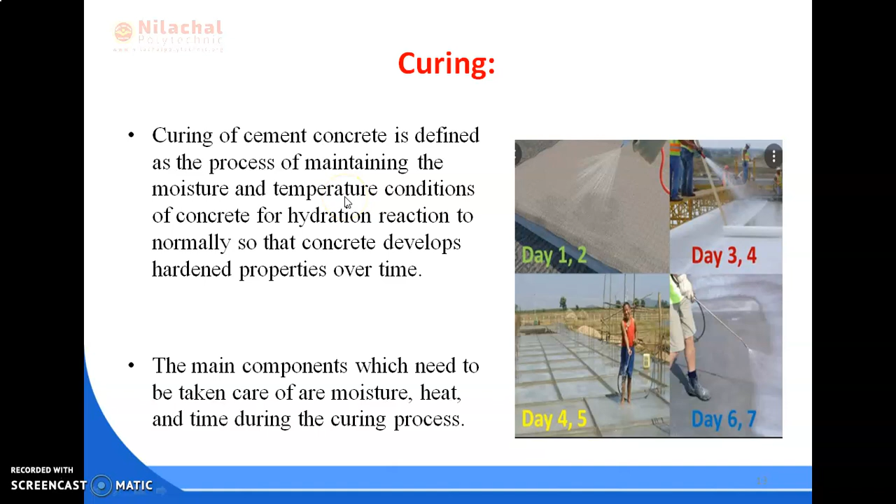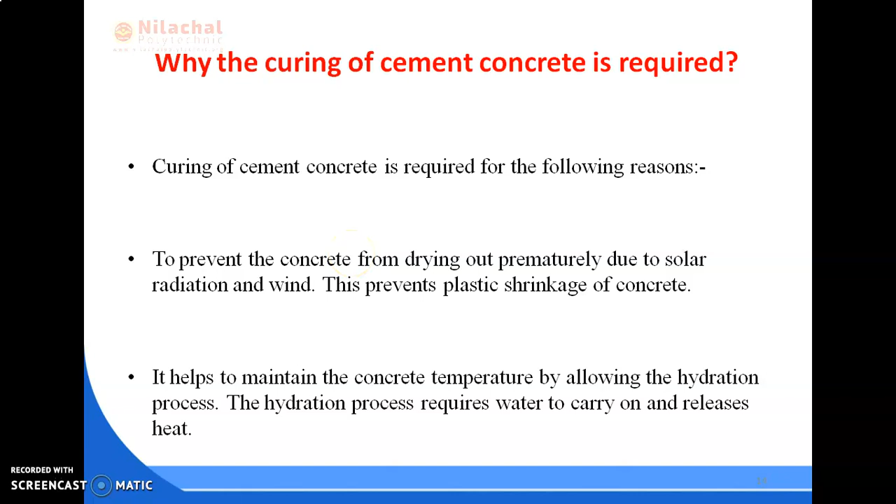In today's lecture, we again continue the same chapter which we started in the previous lecture. In the previous class we already discussed the different methods or steps of manufacture of concrete. We have also discussed curing and why curing is required for the concrete. So, now we are going to discuss different methods for curing.

Before that, I want to discuss some effects of improper curing: the compressive and flexural strengths are lowered, durability decreases due to higher permeability, the rate of carbonation increases, and the surfaces are coated with sand and dust, which leads to lower abrasion resistance. So, due to improper curing, we have to face these problems in concrete.

So, methods like water curing, wet covering, formwork curing, membrane curing, sheet curing, curing by absorbing heat, hot mixing method, electrical curing, infrared curing, cover with sand or sawdust or soil, etc. Natural curing, which is exposed concrete. So, these are the basic or important methods which we use to provide good curing to concrete.

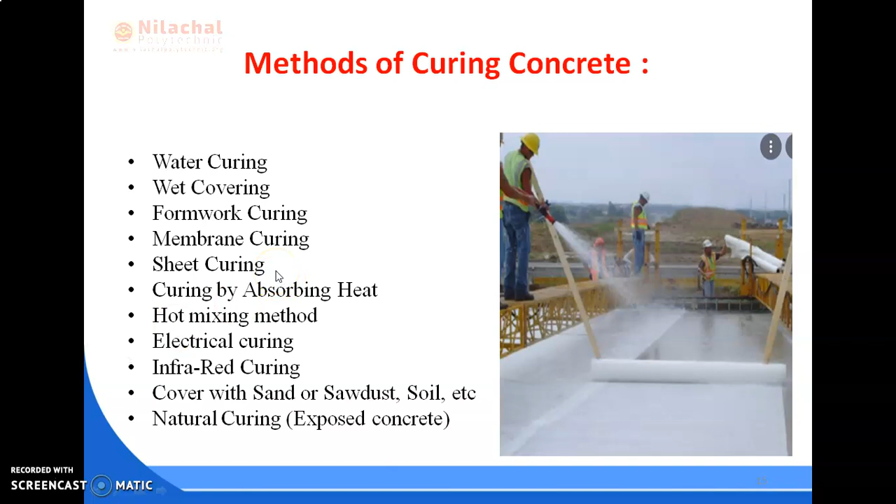And shuttering, as I have already told, is a synonym term of formwork. In many countries, people use the word shuttering instead of formwork. And formwork is the most effective curing agent in construction, especially in thick concrete where the hydration temperature is high. This method is used.

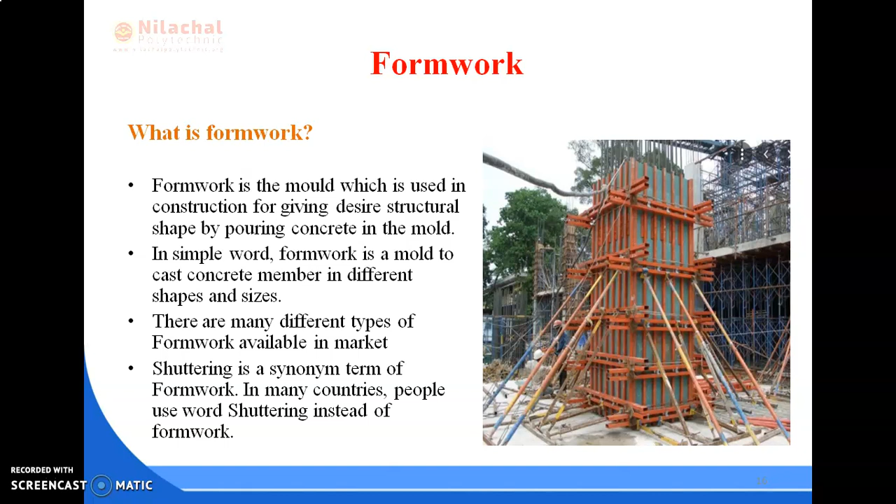So, this is the formwork. A good formwork should be strong, stiff, smooth and leak proof. Otherwise, there are chances of segregation of the fresh concrete. The cost of formwork is 20% of the total cost of the project. So, the forms are properly designed and detailed to effect economy without sacrificing strength and durability of concrete.

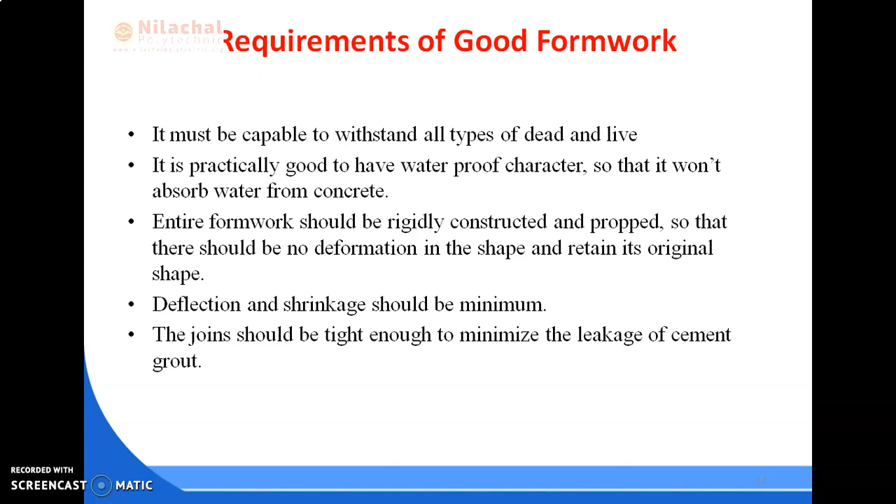Next is requirements of good formwork. First, it must be capable to withstand all types of dead and live load, and it is practically good to have waterproof character so that it would not absorb water from concrete. Entire formwork should be rigidly constructed and propped so that there is no deformation and it retains its original shape. Deflection and shrinkage should be minimum. The joints should be tight enough to minimize the leakage of cement grout. So, these are the basic requirements of a good formwork.

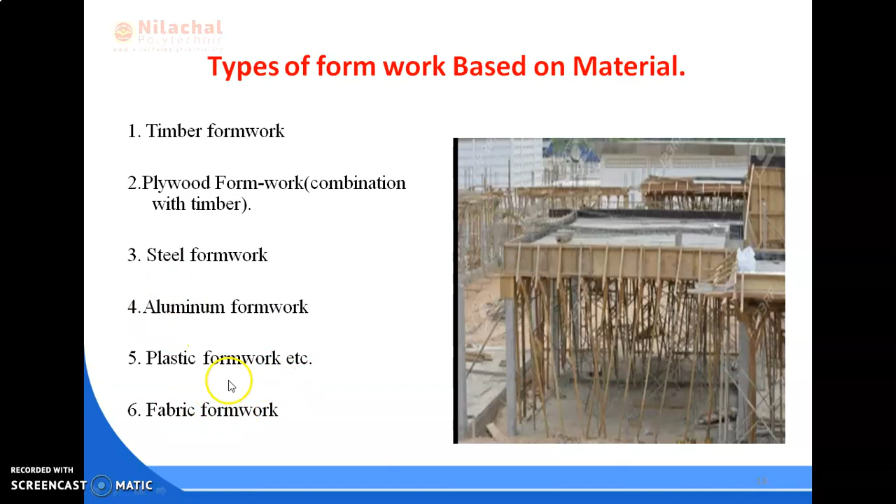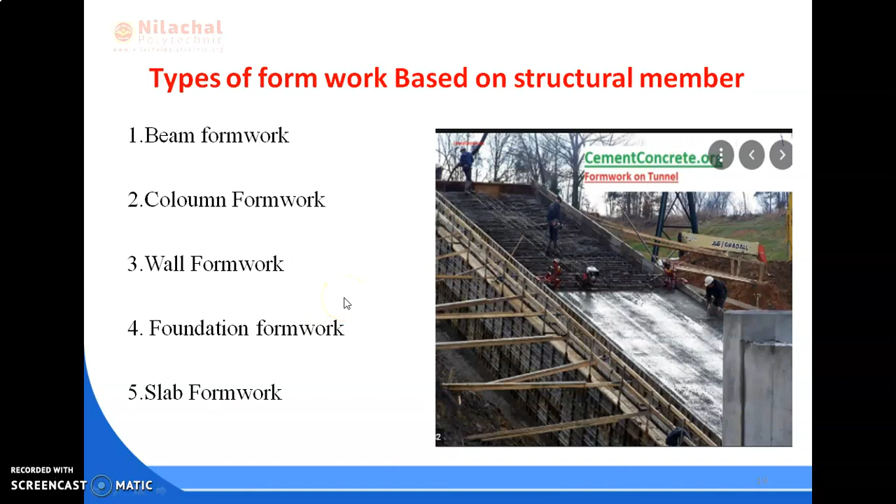The next is types of formwork based on material. Based on material, these are some types: timber, plywood, steel, aluminum, plastic, fabric. So, basically we use these materials to form formwork. We can also classify formwork based on structural member, like beam formwork, column formwork, wall formwork, foundation formwork, slab formwork. As per the structural member, we name it.

The supporting period differs according to the type of cement used and the design of formwork, or as per our requirement. In general, for structures carrying construction loads, side timbers shall not be removed within 7 days and supporting timbers within 28 days of placing of concrete. So we have to take care of it.

Also, many factors can affect concrete formwork removal times, like grade of concrete or cement, type of cement, mainly the temperature, size of form, etc. So during stripping of formwork, we have to remember some major points: formwork should not be removed until the concrete has developed sufficient strength to support all loads placed upon it.